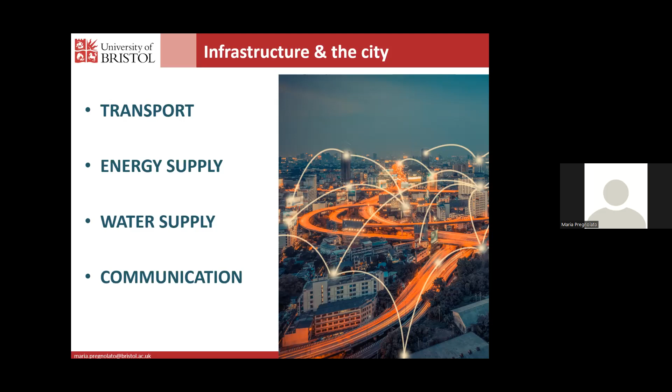So if we were able to protect our infrastructure, we are much more likely to guarantee the strength and the robustness for the whole society. This is because when natural hazards hit infrastructure, we have, first of all, the service disruptions, so less functionality of the infrastructure themselves, with power cutoff, lack of accessibility, and also victims and casualties.

And this situation is actually not going to improve because we know that urbanization is going to bring more and more people into cities. Climate change is going to increase the likelihood of extreme events and their intensity. And also there are underlying complexities in the urban environment. As I was saying before, cascading effects between infrastructures, but also more reliance, for example, on technology.

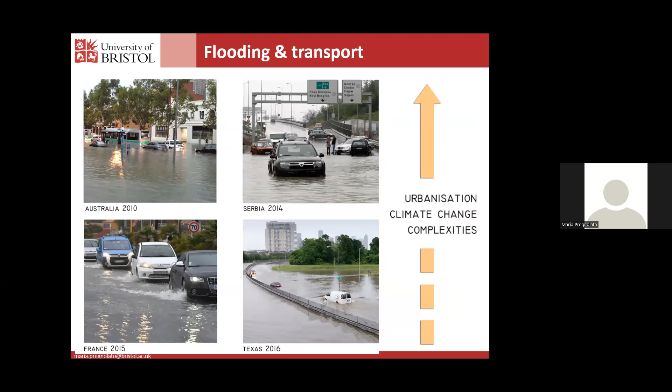So our community and our project is targeting infrastructure resilience to floods with the aim to produce new tools for better planning and decision making. And as I was saying, we are 3 universities with also external stakeholders who try to integrate our different expertise in order to produce a more developed model, which is making the most of all our pieces of research.

And in particular, we are trying to put together the hydro transport model that was developed by the University of Exeter through a European project, a flood transport curve that I developed during past years at Newcastle University, the evacuation model, which was developed for pedestrians at Cardiff University, and then experimental data about vehicle and pedestrian stability, which are available in the literature.

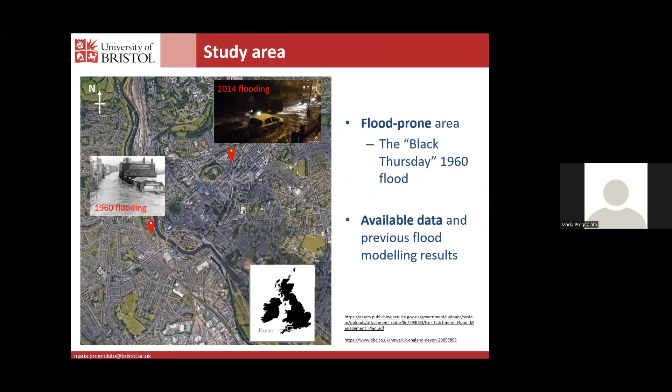As I mentioned, the study area is Exeter, which is in Devon, in the UK. This is because it's a flood-prone area, and here we have some examples from past flooding and historical events, and also we had available data from previous modeling results and projects.

So here we are trying to develop stability curves in order to understand when a road can be considered safe to be used by vehicles based on flood depth and flow velocity. And this is, I would say, the first novelty of this work, because in the past, most of the modeling studies are based only on flood depths.

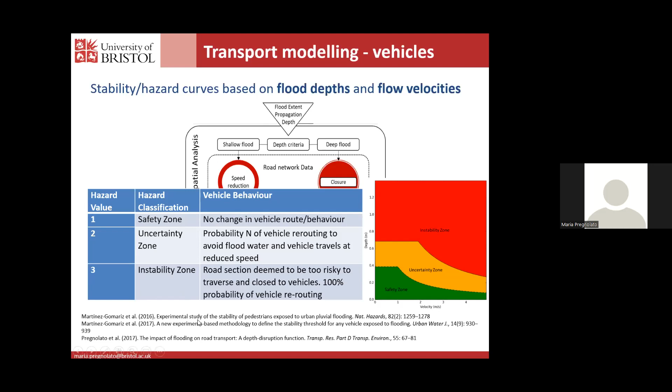Here instead, we are trying to define these instability zones by using a combination of flood depth and flow velocity, dividing then the hazard classification into 3 parts: the safety zone, where there is no change in the vehicle performance, the uncertainty zone where there is a probability of the vehicle to reroute, and then an instability zone, which is a zone of the road which is considered closed because it is too dangerous for the vehicle to pass through, and so the rerouting of the vehicle is needed.

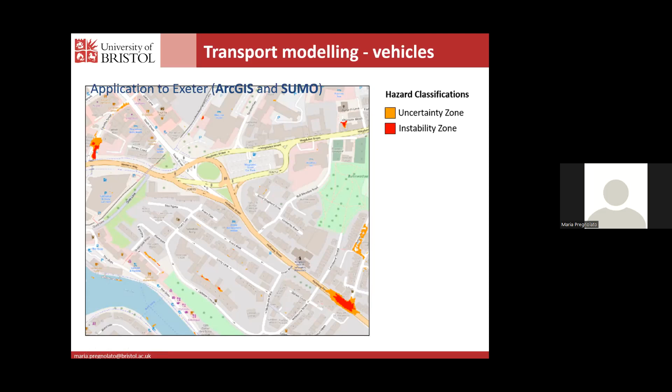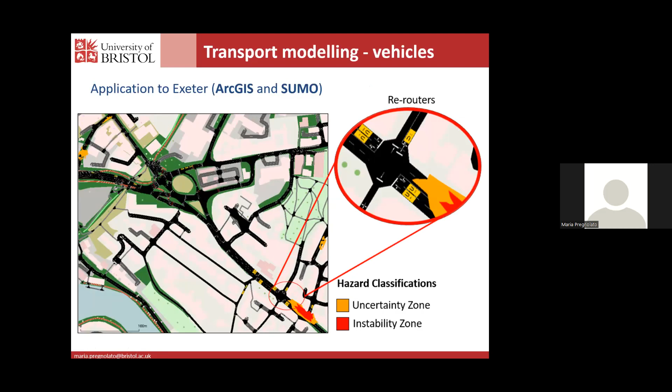This is the application to Exeter, in which we are using ArcGIS and SUMO, and we started to classify the various areas of the road according to some flood simulation of past events. And this is what actually in detail SUMO can do. So when you are able to identify the hazard classification in the streets, SUMO then will reroute the vehicles according to certain criteria. And these criteria can be defined. So you can say to the vehicle to follow the vehicle ahead, you can put some aversion of the risk, or you can just simply set up an algorithm for the shortest path or the shortest distance.

Also for pedestrians, we are developing a model. So there are various mechanisms of evaluation of the evacuation routing of pedestrians in the literature, based on the various mechanisms of stability of the pedestrian. Of course, we have different classes of pedestrian because we can consider adults, we can consider children, or also vulnerable categories. And the thresholds of velocity and depth for these categories are different.

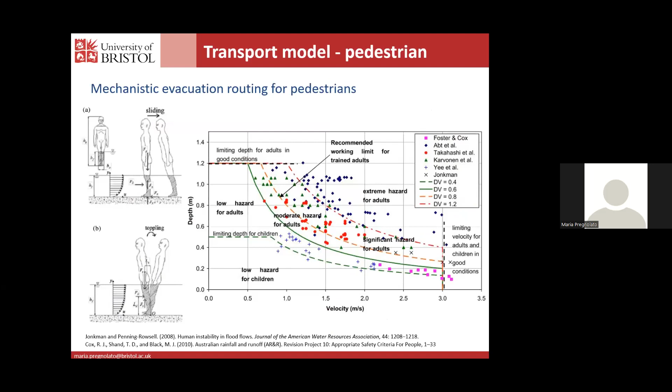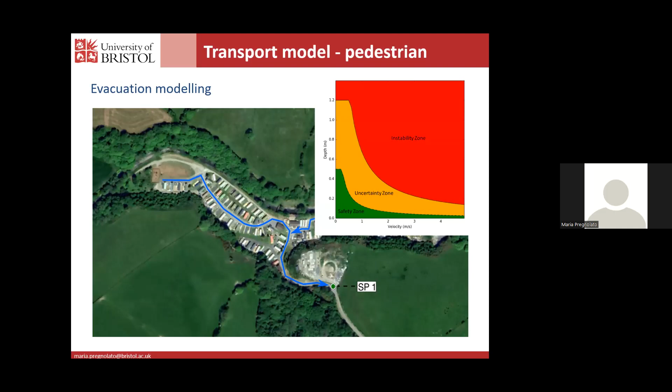What we are trying to do here is to model a sort of evacuation system, so to establish safe areas in which people can go during the events, and also safe routes in order to reach them with a very low danger. And also in this case, we are defining different stability and instability zones based on depth and velocity of the flood water.

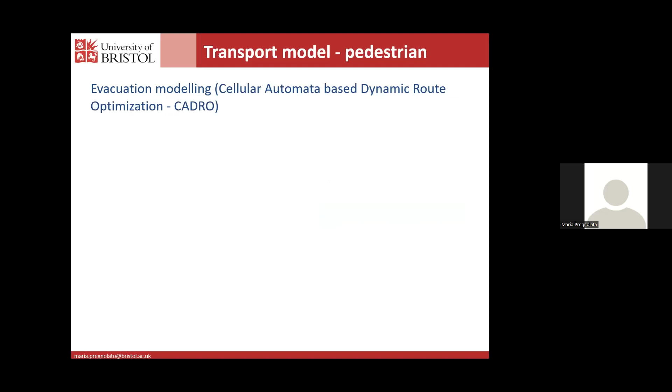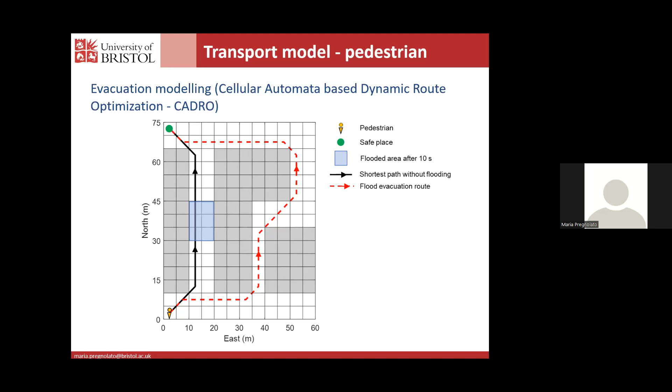What we are using here is an evacuation model based on cellular automata-based dynamic route optimization, which is also called CADRO, and essentially is able to optimize over a series of criteria the shortest path with and without flooding for a pedestrian. And here we can implement various criteria in order to understand which is the best flood evacuation route according to the pedestrian class in order to reach the safe place.

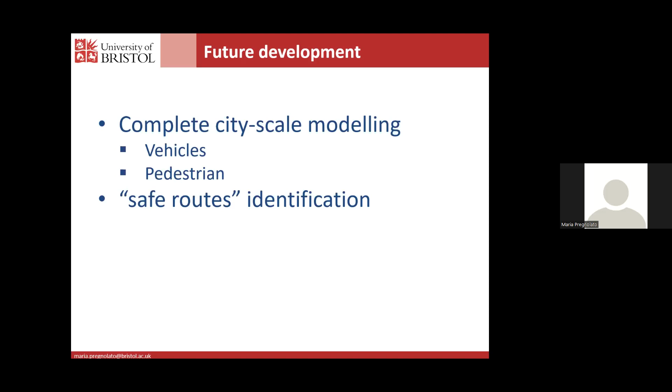Future development of this research will be to complete the city-scale modeling for Exeter for both vehicles and pedestrians, and also to try to identify these safe routes, because we think that this identification is very much important for the preparedness of the city, so that when an event happens, both vehicles and pedestrians already know what to do. Of course, here we see a kind of gap in the implementation of it, because we would expect the city to put forward some mechanisms such as information of the population, signaling of these safe routes in order to make it happen. And we are working with the Devon County Council in order to understand how this can be implemented.

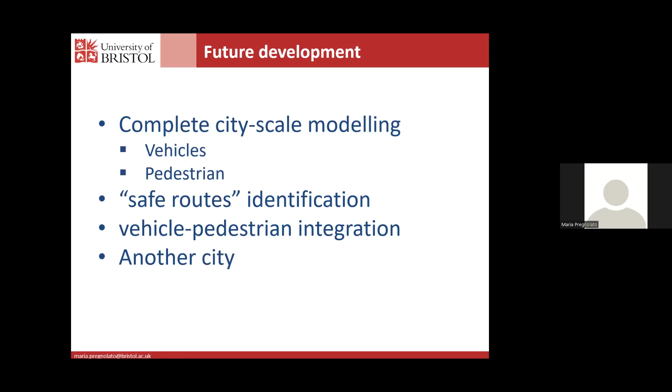We would like also to integrate vehicle and pedestrian modeling. So for example, there could be someone starting with the vehicle that decides to abandon it and then starts to walk. So we'd like also to try to model this type of hybrid mode interaction. And then we would like to test our tools and our models, perhaps for another flood-prone city, to see how the model works, and also for comparison.

As I was saying, this more than a project is a community based on transport resilience to flooding. So we had workshops in the past, aiming to engage with stakeholders, with the industry, and with the broader community in the UK working on the topic. And moving forward, we would like more and more people to join us, given that now remote working is much easier. So this is a very open invitation to everyone who would like to work on transport resilience to flooding to get in touch and enjoy our community together.

And possibilities for this community are to develop joint case studies, also to exchange inputs about gaps and challenges, as well as just share expertise and best practice, because sometimes we don't really know what each other is doing. So it's really a matter of putting together our knowledge. And then perhaps when we grow as a community, I'm interested to build some subgroups, perhaps focused on specific interests, for example, early warning, evacuation, risk assessment, and so on. And anyone is welcome to put ideas and their leadership forward in this.

And finally, of course, there is a big interest to write joint proposals and projects together, thinking about big projects, but also smaller ones, such as co-supervision of students or just a small collaborative pot of funding that every now and then can appear.